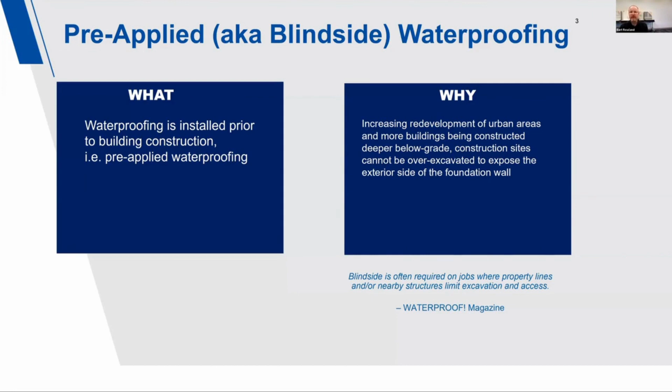Typically, you're using a substrate such as soil or gravel or a mud slab prior to the concrete being placed on top of the waterproofing membrane, or you could be using some type of shoring like a sheet piling or soldier pile and lagging, or even shotcrete for the membrane to be applied to prior to concrete placement. Really, you're only using a single-sided form to help make sure the concrete is placed correctly. So these are some guides for today's discussion. There are post-applied waterproofing applications, and that would be a separate discussion, but there's certain technologies that we'll speak to that can be used in both pre-applied and post-applied applications.

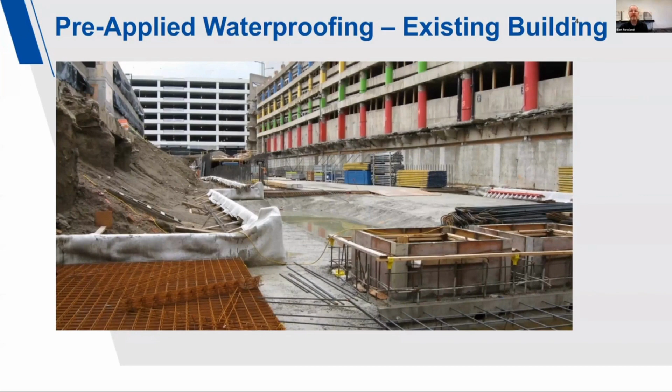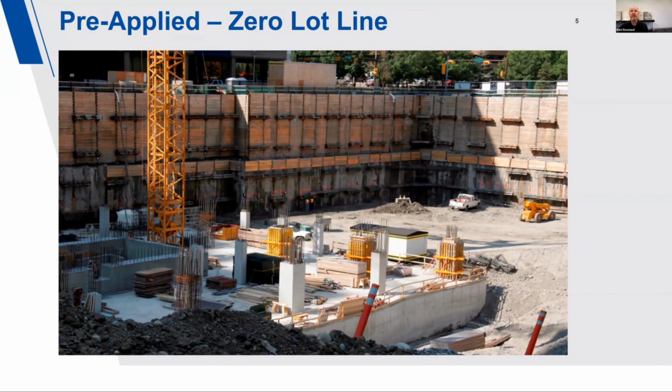Another example here, you can see a photo where you've got soldier pile and lagging, helping maintain the excavation so the site does not collapse upon itself. You can see active streets with street lights above it. So this is where an ideal pre-applied waterproofing application would take place. You would apply either a drainage composite on top of this shoring and then a waterproofing membrane, or if the substrate is suitable, apply your waterproofing membrane directly to the substrate.

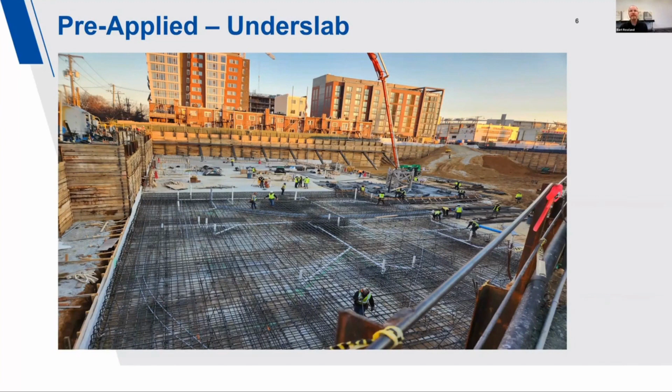One of the challenges, though, is that plywood adds to the cost, or could add to the cost. Additionally, if you put your membrane contouring around the inside of those sheet piling, which is common, it may require some additional detailing. So that means more tapes or mastics could be used wherever the membrane's cut to make those contours. And that could also drive up the cost, but further increase your risk. So these are the types of things, working with a company such as Henry, you'll get better guidance on what type of technologies are best suited for this type of substrate.

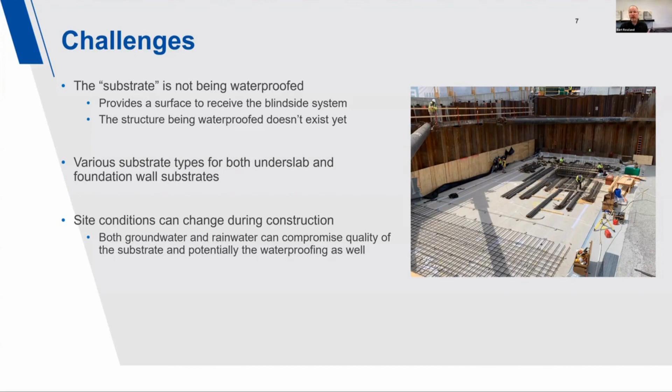And there's groundwater conditions where dewatering wells need to be active. And then you've got heavy rain in certain areas. This is the lowest point on a job site, so all sorts of debris and water are going to end up on that site. So how that affects your waterproofing membrane will be very important in your overall considerations.

And as I touched on earlier, sequencing of trades. There's a lot of trade traffic that happens on a job site, people dragging reinforcing steel, plumbers, mechanical, electrical workers that are trying to get their job responsibilities done. You need to make sure that the membrane is going to be sufficiently robust to handle that type of job site traffic.

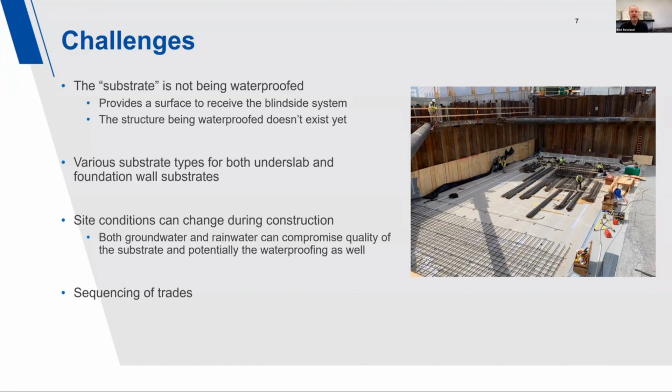Working with a manufacturer such as Henry will help you select the appropriate detail or provide the solution that will allow for the right detail to address that type of condition. Because ultimately you want to have a continuous, defect-free waterproofing application. And the term blindside applies because you won't get a second chance. You're putting the membrane onto a shoring or substrate, concrete's going to be placed.

You don't know if it's going to be perfect, but you have an opportunity throughout the installation to make sure any type of damage or sequencing can be coordinated through a pre-construction meeting, and everything gets addressed before it's covered in concrete. Because if it's covered in concrete, it can prove problematic at a later point, and then ultimately remediating could be very costly and time consuming.

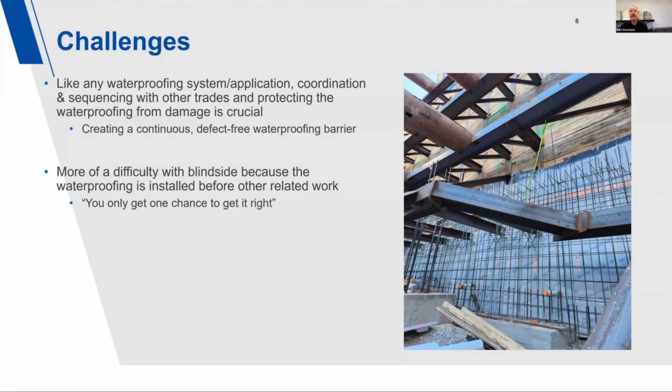So when you think about the subgrades, mud slabs can add to the construction cost. So if there's an opportunity to value engineer, typically mud slabs can be removed. Now, mud slabs as a whole are typically a lean mix concrete, and they may not always be in the best condition.

Some will be in very nice condition, but ultimately that might require some additional surface preparation, which can delay the schedule as well as could become costly.

Subgrades such as number 57 stone or compacted soil also give you a great substrate for your waterproofing membrane to be placed on top of, but to ensure that the subgrade is properly compacted may require some additional evaluation. That's where some of the quality assurance pieces incorporated in your specification can be of value, because that will help, maybe with a third-party inspector, validate that the compaction and the subgrade are in suitable condition to install the waterproofing.

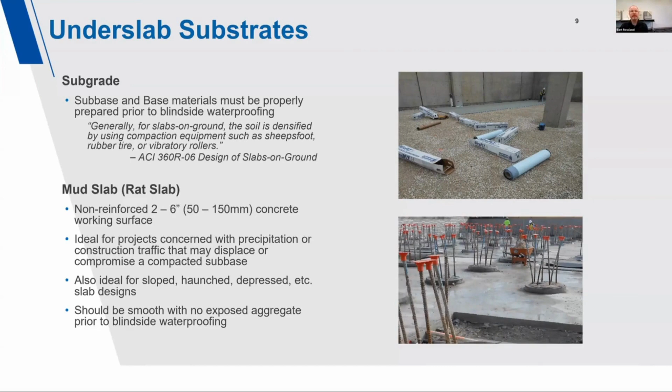Because if you look at this holistically, the speed of an installation in an overall construction project is very important to several parties on that job. You want to make sure that that speed or zeal to complete the project quickly doesn't compromise something as important as pre-applied waterproofing.

And I touched on this a little bit earlier, but with the wall substrates, you've got support of excavation, sheet piling, slurry walls. There's a number of different types of applications, and how you can detail those most effectively to not become problematic at a later point. When you have to remove whalers and cross bracing, how you detail that afterward is very important.

Tiebacks, soil nails, they have a certain problem in various projects, and you want to make sure you detail them correctly. Is it a very labor-intensive detail, or are there prefabricated tieback covers that you can use on top of it to ultimately reduce your risk while ensuring that continuous defect-free waterproofing product?

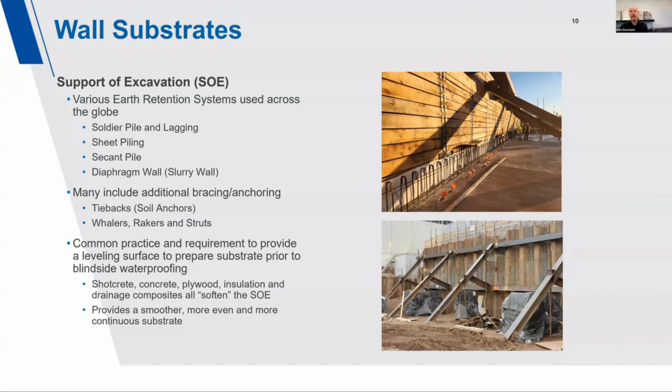Henry Carlisle Company looks at the risk factors and risk tolerance on projects through working with the design team and understanding what the ultimate goal or the end use application is, and that helps drive the product selection. There's not one product that we're going to use for low risk to high risk applications, or we're going to take a technology and then make it thinner based on the type of application. We have a wide breadth of portfolio which will allow us to select the appropriate technology based on the information we have on the project.

And we look at this a couple of ways. If the end use application is a parking structure or an occupied finish, there may be different drivers to product selection. Slab thickness: if it's a thin slab area, it's going to be easy to repair should there be damage or debris. If there's a thicker slab, then you really need a high puncture resistance type of product, and that's going to steer you towards more of the high performing technologies.

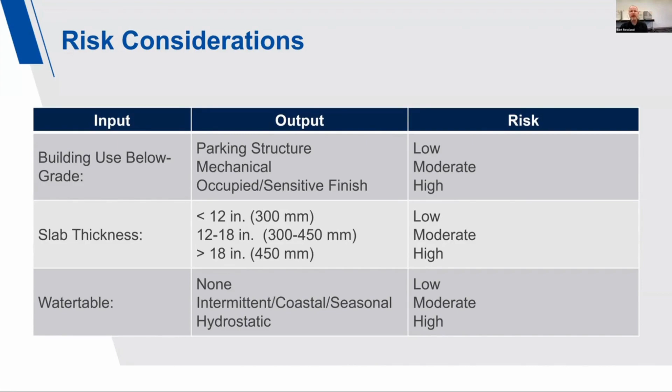And last but certainly not least, water. On-site water, is there water there? Is it seasonal? Is it a high hydrostatic condition? That's going to help you select a product to make sure that it's in the best position to keep that building dry. And there's another piece too, such as environmental requirements. Methane, radon, harsh contaminants in the soil. The different products have different types of performance in these types of conditions, and you want to make sure you select the right product.

One of the key differentiators, or an industry evolution if you will, is the lateral water migration. Most credible manufacturers test their membrane to ASTM D5385, which is the universally accepted resistance to hydrostatic pressure. Within the last 10 to 15 years, the lateral water migration test is more driven out of practical implications of what happens on a job site.

When there's a breach in the waterproofing and there could be water bypassing the membrane, getting between the membrane and concrete, is that going to be easy to remediate? In certain types of attachment methods for membranes, such as mechanically attached, water can move and it's very difficult to localize. So where you see the water might not be where you have to fix the water. So that's where a lateral water migration test is very important.

And right now it is not a standard test, but the ASTM is looking to standardize that test because multiple manufacturers have developed a method where they can test their membranes, but there's no one uniform standard that they're all measured against. So the ASTM committees are going to be looking to standardize that with various input from manufacturers to make sure that when everybody is measured against that standard, the data will support the utilization of those types of products.

Now I would like to focus a little bit more on the different types of technologies that I touched on earlier. For pre-applied or blindside applications, MiraClay is one such solution that can be utilized to solve low risk or medium risk applications. MiraClay is based with a bentonite mineral, and the bentonite mineral is comprised of sodium montmorillonite, and it's compartmentalized between a woven and non-woven fabric. It's needle punched together, and it's used to self-seal and self-heal on various job sites.

You mechanically attach it, so you would staple it together, shot and pin into shoring. And then because of its active nature, where water comes in contact with the bentonite, it will swell. And bentonite will swell up to 15 times its normal size in an unconfined situation. But under confining pressure of concrete, as well as a compacted subgrade or a shoring, it creates a hydraulic barrier which is impermeable, so water cannot get through it.

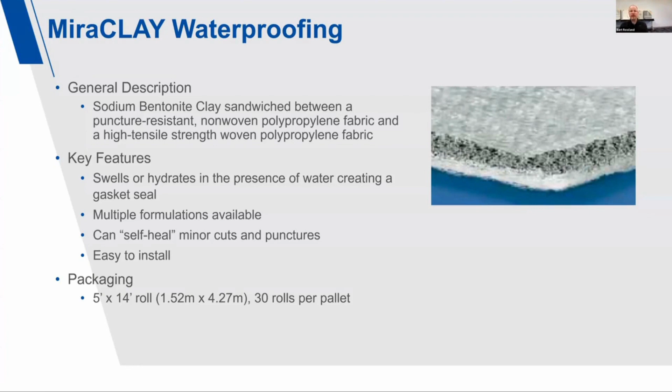But it's a very unique technology and has a mechanical attachment to concrete. It's been proven for hundreds of years in a myriad of applications, and it's a naturally occurring mineral. So it does have some challenges if it comes in contact with certain types of conditions. So there's enhancements that can be made to the product to ensure it performs on various types of applications. You can see here 3 different gradations of the product.

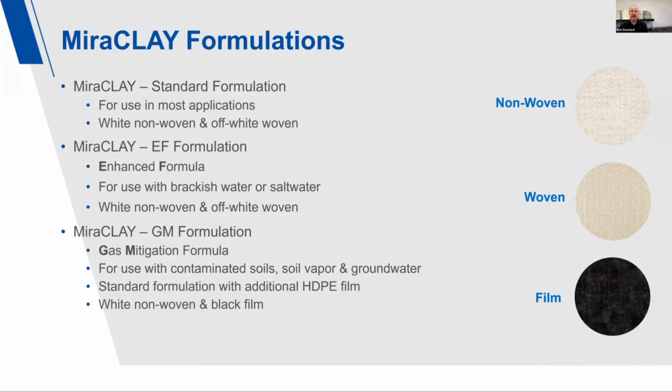The EF is an enhanced formula product, which incorporates a polymer which helps the bentonite swell in harsh conditions, as well as the gas mitigation formula, which relies on a high density polyethylene film, which will help protect the bentonite from certain contaminants in the soil that might impede its ability to swell and keep water away. But the entirety of the MiraClay product gives you a wide option based on site conditions to select the right type of technology based on your challenges on a job site.

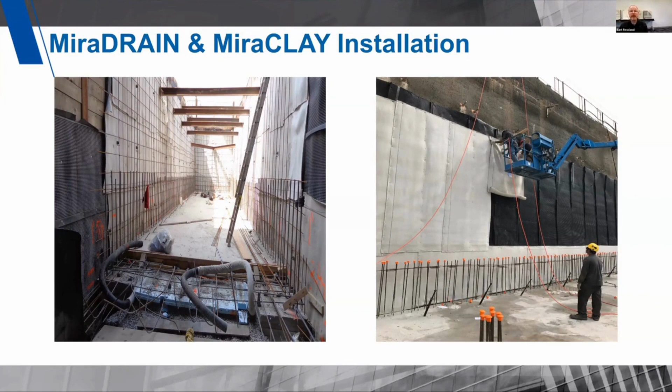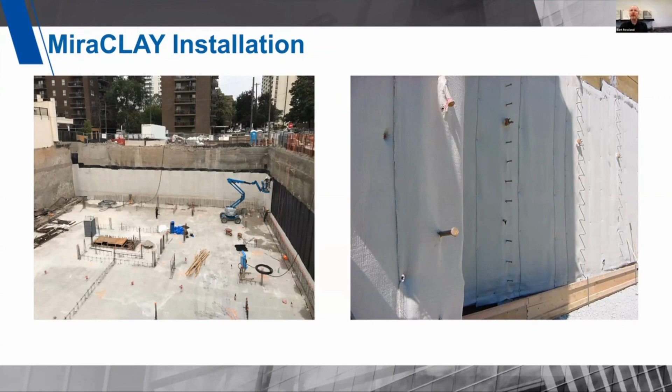So the MiraClay product will serve its purpose on certain applications. Working with a trusted advisor such as Henry will help recommend when and where this is the right product for your project. Here's a couple of additional photos. You can see a nice aerial shot of a large, deep foundation where you can see the MiraClay installed. You can see that the concrete is already poured prior to the walls being cast. And that's going to vary based on the sequences of the project. And you can see in the other photo, we've got some Nelson studs that can be detailed with some MiraClay mastic.

I now want to focus on the Blueskin PreSeal, and there's 2 different gradations of the Blueskin PreSeal product. What makes this very unique is the dual bond technology. It's a polypropylene plastic membrane with a polymeric saturated geotextile, which is embedded into that polypropylene. That polymeric saturated geotextile will have a mechanical bond, so you get the immediacy of the bond of that mechanical material, and then you can get the long-term performance of the adhesive bond, which is the polymers that are saturated within the geotextile. It's a very unique technology.

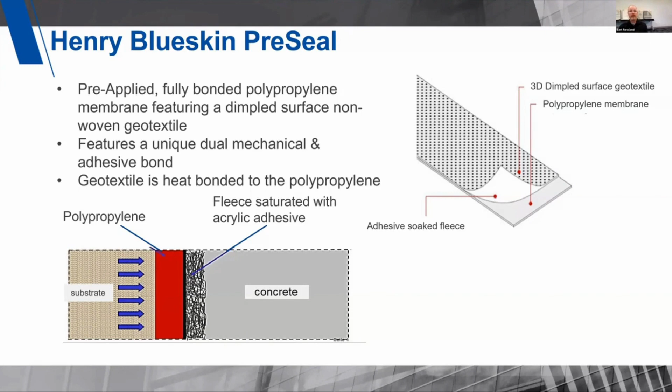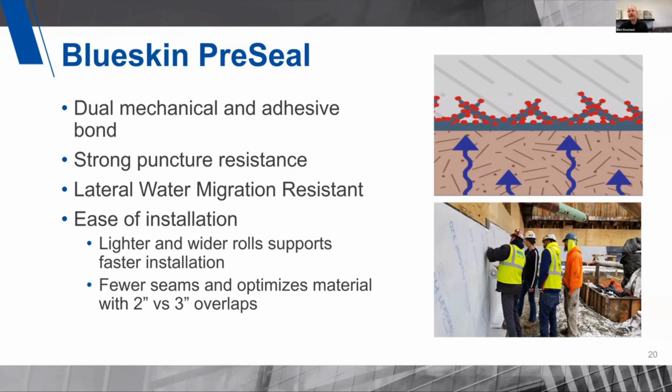It has the 2 different thicknesses, which I'll speak to in a minute. But because you have that dual mechanical bond, you get a very robust bond to the concrete. It does have lateral water migration resistance. It's got very strong puncture resistance because it's a passive technology. It's a rigid plastic, but it's easy to work with because it does have a wider roll, and I'll show you some photos there. It also is cost effective in certain situations because you do have more usable material per square foot with a 2-inch overlap versus a 3-inch overlap with certain products.

Here's the 2 different thicknesses of the material. You can see the Blueskin PreSeal 320 is a 32 mil system, as well as Blueskin PreSeal 435 is a 43.5 mil system. Both products are very lightweight. They have 2 different sizes, typically a 3.3 by 65.5 or a 6.6 by 65.5 foot.

Rolls. You can see they're very lightweight. They do both resist high hydrostatic conditions. They both have lateral water migration resistance, as I mentioned earlier, and you can use these interchangeably. Typically, the 320 is used on walls and 435 is used under slab in certain hybrid situations, but both are

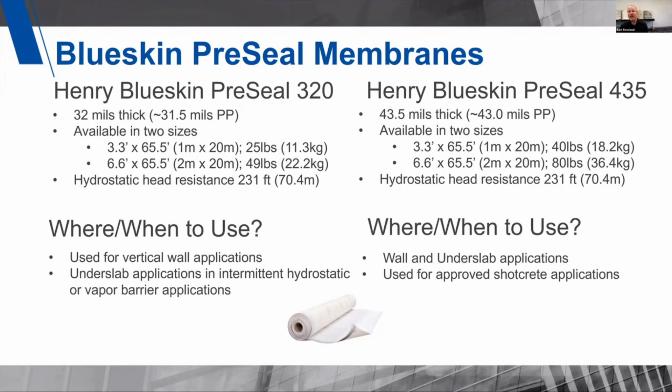standalone waterproofing products that can be used with a 320 on wall, 320 under slab, 435 on the wall, and 435 under slab. The 435 could be used for very complex installations such as shotcrete applications, which for those of you on the call, shotcrete is often more challenging to waterproof than, say, your traditional cast in place.

I want to focus here on these photos of this under slab application. You can see the reinforcing steel. You can see the tape used to detail and the overlap. There is a selvage edge within the membrane itself, but you also can put some additional tape seams for the end laps. In high hydrostatic conditions, you can do enhanced detailing to ensure that the material performs its intended use.

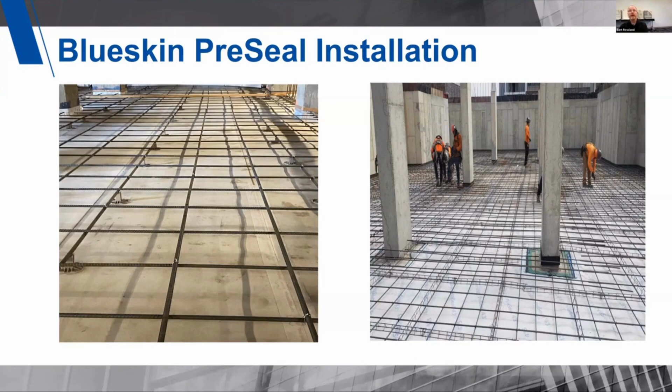And in these types of situations, high puncture resistance is very important. And that's where the puncture resistance for Blueskin PreSeal is over 225 pounds force, which gives you that confidence that if the number 4 rebar is going to be dropped on it, it's going to perform. It's not a risk. But again, speaking to the quality assurance importance, you always want to have inspectors and a well-trained installer ensure that the material is put in its best position to perform.

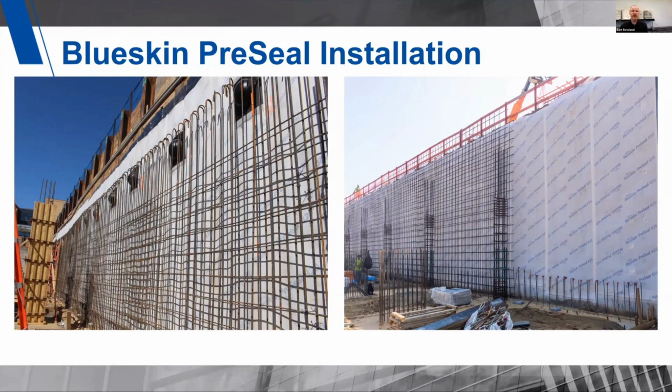Here's a couple of photos that actually show you a vertical wall application. You can see the prefabricated tie-back covers, as I mentioned earlier, but I want to focus on the width of these rolls. A 6.6 foot wide roll shows how you can reduce the overall number of seams on a project without increasing risk. These rolls being very lightweight, rolled down and covering up a lot of the area, they can accelerate the construction project, but without creating additional risk to the installer or the end user.

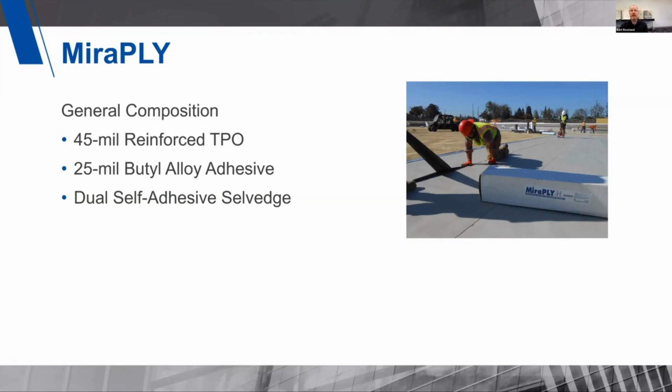MiraPLY, and both Blueskin PreSeal and MiraPLY are kind of in that moderate risk depending upon the application, but the MiraPLY product is an even more robust technology. It's a 70 mil product. It's a TPO with a butyl alloy adhesive, similar to PreSeal, where it's got the selvage edge, so it bonds to each other, utilizing its SeamLOCK technology.

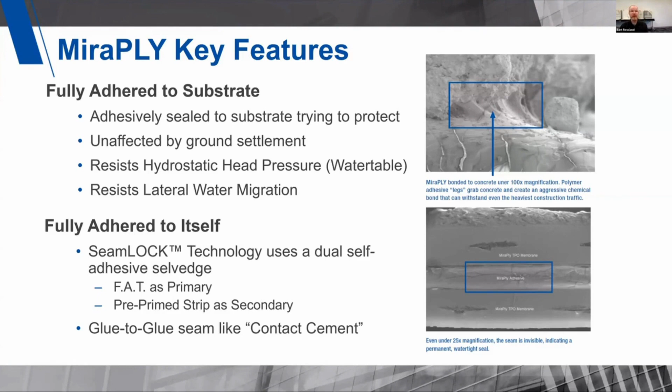The MiraPLY product also has a strong resistance to lateral water migration, has a definite performance against hydrostatic head pressure, and it has a tenacious bond through its adhesive bond to the concrete. It's also a very strong, high puncture resistant system, even greater than Blueskin PreSeal at over 300 pounds force. So it's a very strong puncture resistant product, ideally suited for very thick concrete slab applications.

There's 2 different grades of the MiraPLY product, MiraPLY H and MiraPLY V, and they're horizontal and vertical respectively. The vertical product actually has a release liner, which would be removed, but that tackiness of that vertical product can bond to concrete really quickly. So it helps ensure that adhesive bond that I mentioned, which is critical to this MiraPLY product.

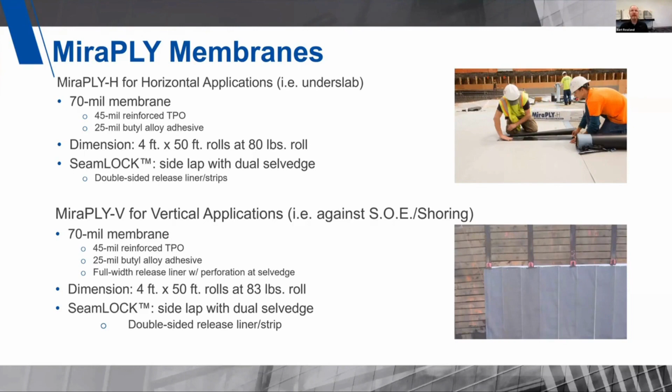It's very installer friendly, and you can see how robust it is. You can see the applications where you've got a lot of trades storing their materials on top of it, which is great given that 300 pounds force capability. Now you've got a long-term performance of the membrane, which will not be compromised.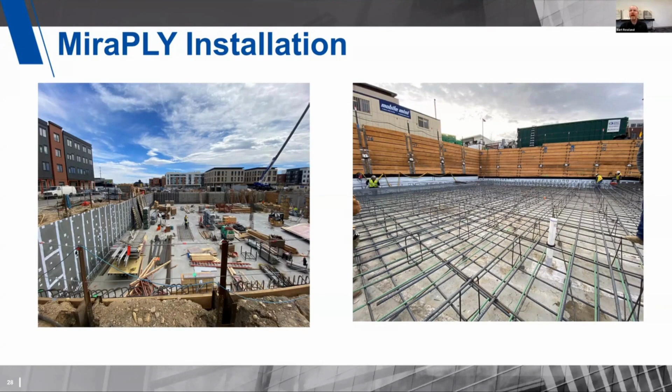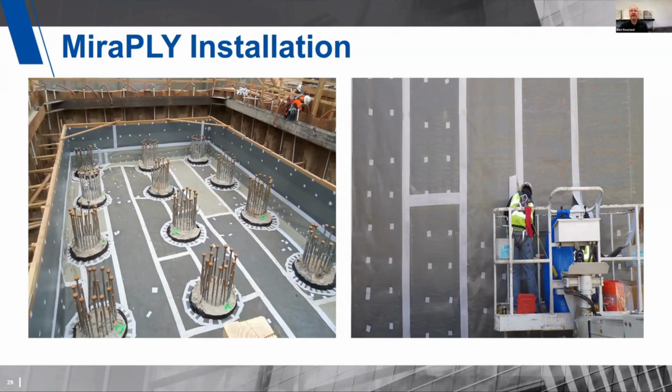You can see it's also easy to detail with these pile caps. You can see it's a tape seam system like the MiraPLY product, the Blueskin PreSeal product. In that tape seam, there's a detailing tape as well as a seam tape, as well as a number of accessory products that will help ensure the product is detailed and performs correctly.

Moving on to the MiraWELD, this is where you take all the physical properties of the MiraPLY and you enhance it even further with a welded seam. This patented technology with a welded seam gives you an adhesive bond or full bonded system with a weld, unlike some of the other products on the market which are welded, but they don't have that true integral bond that the MiraPLY and MiraWELD do.

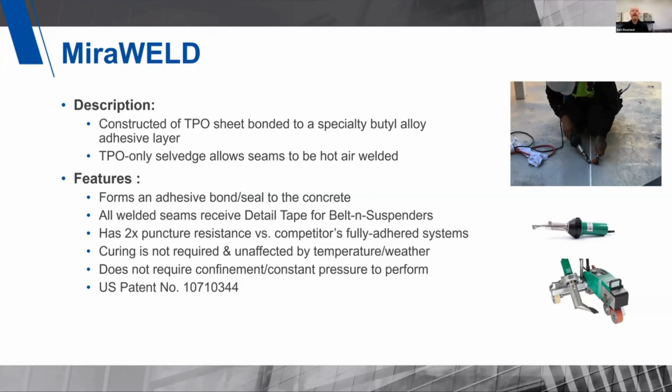It has incredibly strong puncture resistance like the MiraPLY, and you can also put a detail tape on top of that welded seam so you have a true belt and suspenders approach, because you may not get that second chance to keep that membrane and that wall or under slab area tight.

That toughness that I mentioned is very important because of thick slabs, trades, everything that I mentioned earlier. You want to make sure that that material can withstand inclement weather, harsh job site conditions, and third-party damage as much as you can.

The welded seam: there's different types of equipment that can help with welded seams, handheld welders, automatic welders. This is very important because this relies on very skilled and well-trained labor. So it's different than some of your mechanically attached systems or your tape systems. This is usually a select group of contractors that are very well trained by the manufacturer, such as Henry.

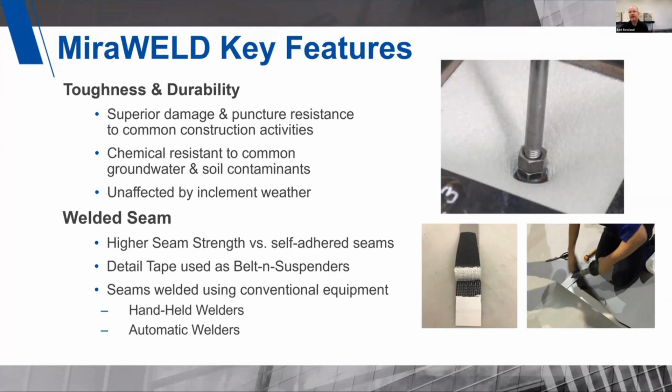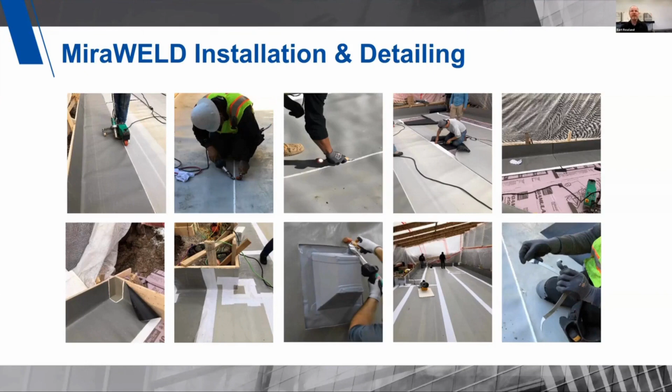So you can see here some photos of probing the seams. Again, a great opportunity for a third-party validation on a job site is to probe seams or ask for documentation from the installer that he's been trained by the manufacturer to install this type of material. You can see here on these photos, thick rebar slab, as well as the release liner and tape on the photo on the left.

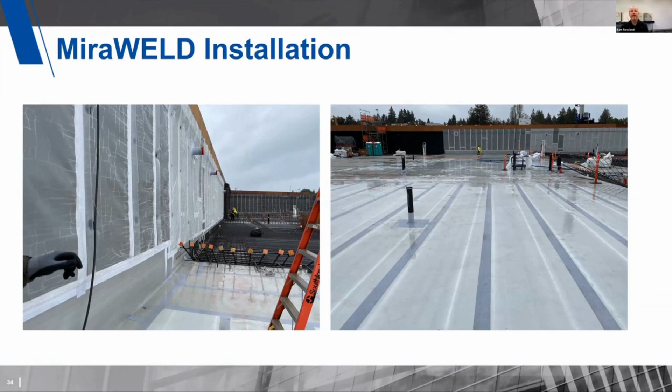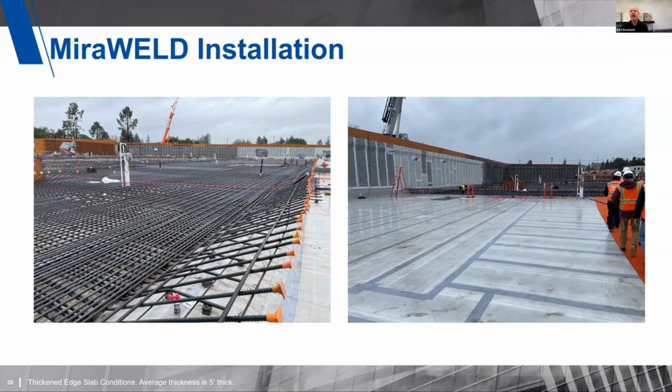Then you would have the photo on the right where you've got the exposure to rain, and the seam integrity is there. Close up of that thick rebar, and you may see that air horn. That's okay, that will be removed. And then you've got your similar exposure, performance, and harsh sites. And you can see the added precaution of coordinating the trades to walk through a certain area with that walk pad, which is ultimately going to help the membrane perform throughout the project.

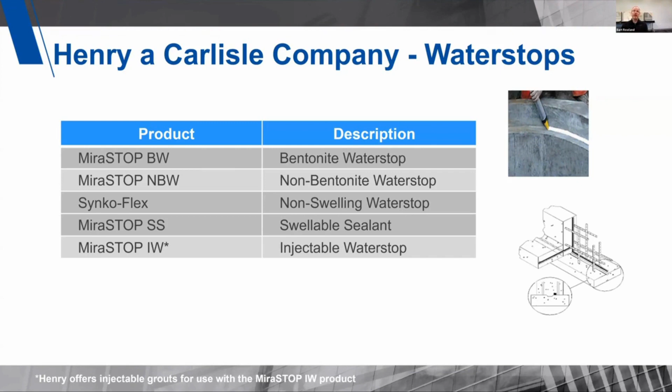No waterproofing or pre-applied application would be complete without considering the full suite of the system itself. And I want to talk about the water stops. There's a number of water stops that Henry, a Carlisle company, offers: our bentonite water stop, non-bentonite water stop, Synko-Flex, and the injectable water stop. The injectable water stop, I'll touch on that because that's truly a form of insurance. But I would look at all water stops as a low-cost insurance for a project.

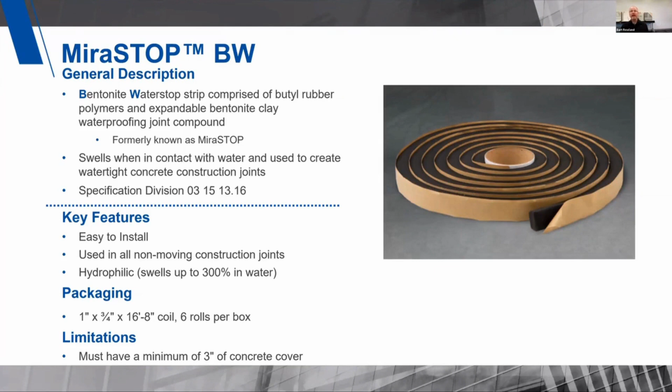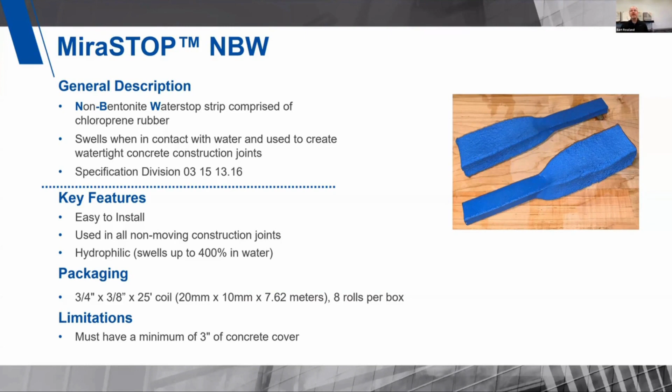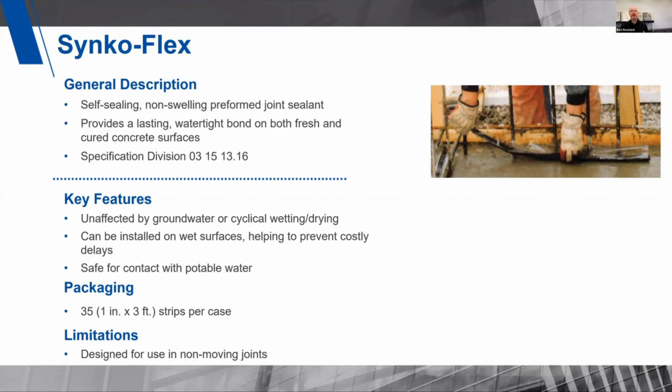The bentonite-based technology is a very widely accepted technology, which swells when it comes in contact with water and can fill some poorly consolidated concrete, a wall slab, or around penetrations. Similarly, the non-bentonite water stop is a chloroprene rubber, which will give it greater chemical resistance, but it's still very much a hydrophilic technology, so it will swell in the presence of water. Synko-Flex is much more chemically resistant than some other water stops, but it doesn't have a swelling capability. But it has great job site survivability because it's bituminous based. So this can be used in various applications such as potable water confining tanks.

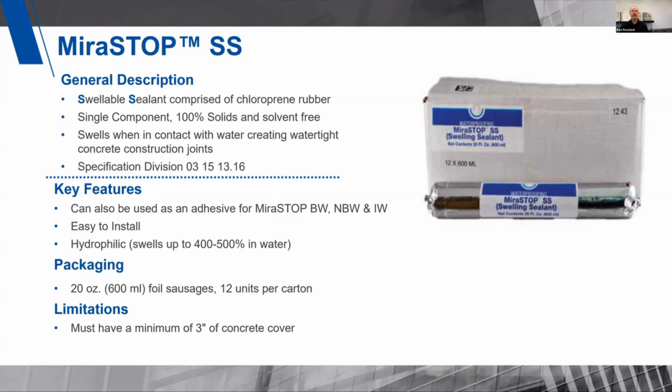The MiraSTOP SS, that's a swellable sealant. That too can be a standalone waterproofing, but it can also be relied upon for additional detailing to make sure that the waterproofing in an intricate condition has an additional level of assurity around, say, a pipe penetration or reinforcing steel in a shotcrete application.

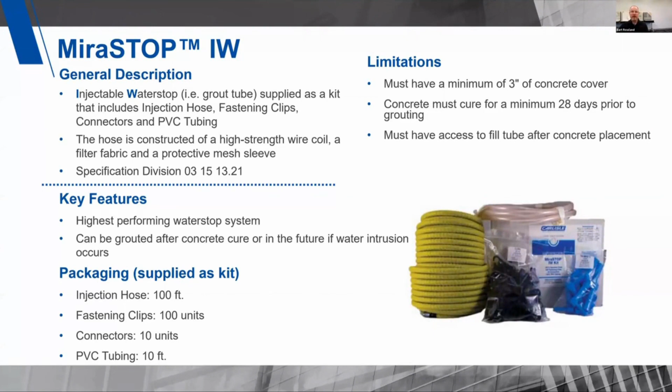The injectable water stop, as I mentioned a couple of minutes ago, is like a low-cost insurance. You put it into place, and if there's water ingress, you can come back and address that water ingress at a later point. And here's an example of where that's of value. You can see the tubes that would be accessible after the application, maybe a little box where you can come in and inject your grout at a later point through the MiraStop CGF or the CGHS.

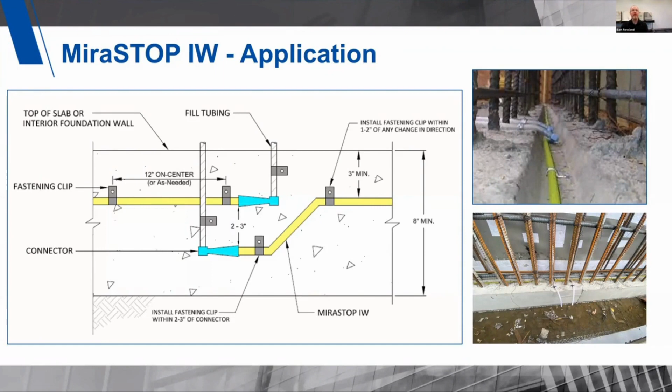This gives you an opportunity to fix it at a later point should there be a problem. It's the ultimate low-cost insurance because you've got the opportunity to fix it now versus trying to remediate at a later point where there's a lot of drilling through the wall, which can become very problematic and extremely costly.

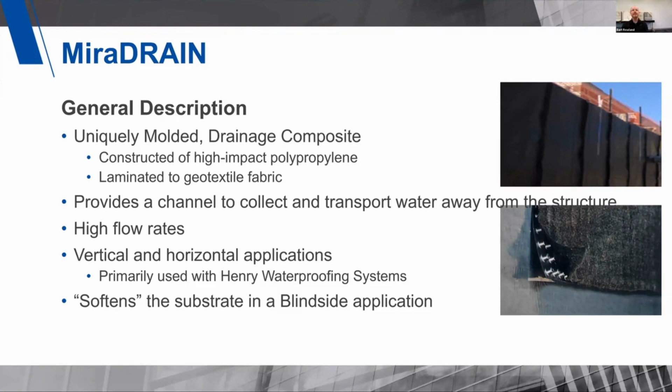As I mentioned earlier, it's not all about products, it's about the overall quality assurance. And the quality assurance is very important when you think about the specification itself. What other than a product can you weave into or incorporate into your specifications? An applicator, geotechnical review.

This is kind of a trusted partner where you have a manufacturer that you can rely on to provide you quality information and help guide you on that project journey. Pre-construction meetings make sure the expectations are set at the beginning, as well as the third-party inspections that I mentioned to help ensure that the intentions are met throughout the project.

An approved applicator, I think this is a very important piece, and this is why I'm here in Carlisle, Pennsylvania today at the Training and Education Center. It's very important to point out that manufacturers have true, credible training programs, not just site demonstrations or exhibitions where they show material at a yard, or the approval of, say, low bidder just to get the project. A manufacturer accredited training program is a very strong quality assurance specification to help you and your customers make sure they get what they pay for.

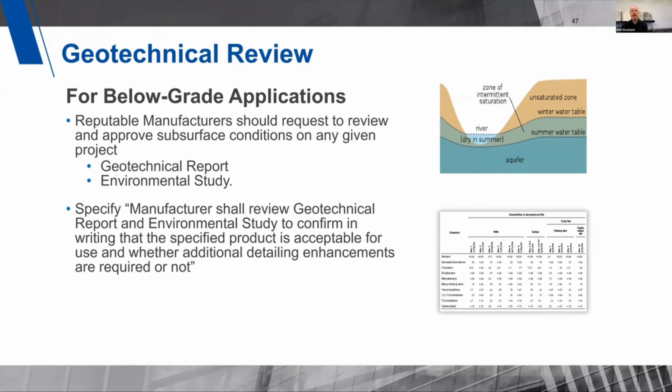Another example is this geotechnical review, not one product for every application, but understanding the site conditions to make sure that you get the appropriate level of waterproofing performance based on your particular site conditions. That's where Henry can be of value to you, providing you this type of technology, this type of support on an active project.

Third-party inspections, this is where you validate everything that's been discussed: the quality of the manufacturer's manufacturing process, the quality of the product being installed, the quality of the installer testing the material, installing the material. You've got an objective evaluator trained by the manufacturer to make sure that everything that you've asked for and specified is getting delivered. This helps everybody address situations when they arise before they're covered in concrete, which is ultimately a concern if something gets past that team. Now it becomes a problem, and it could be very frustrating for the design team as well as the owner if their project has water ingress.

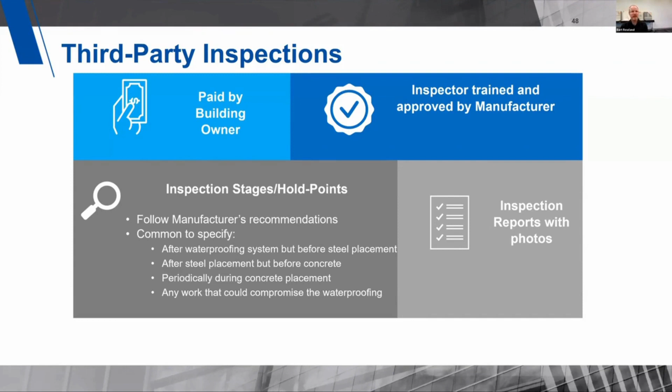So if you incorporate all of these quality assurance principles as well as high quality products, you give yourself the best opportunity to mitigate your risk on various challenging pre-applied projects. And in summary, this is kind of how we look at applications, where we can see our low-risk solutions up to our high-risk solutions, MiraClay, PreSeal, MiraPLY, and MiraWELD, because we have multiple solutions based on the technologies and your site conditions. As I mentioned earlier, we're not going to take one product and try and shoehorn it into every type of application. We want to understand the application before we make a product recommendation.

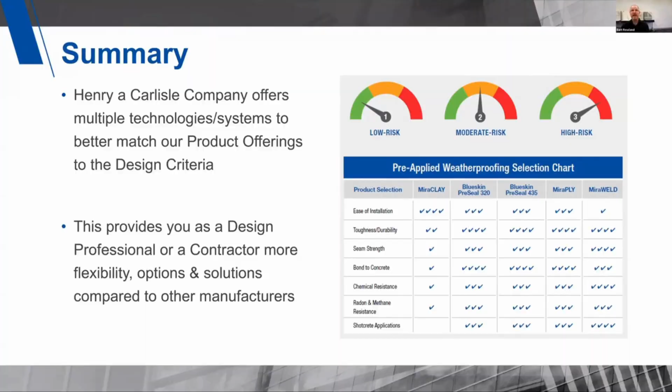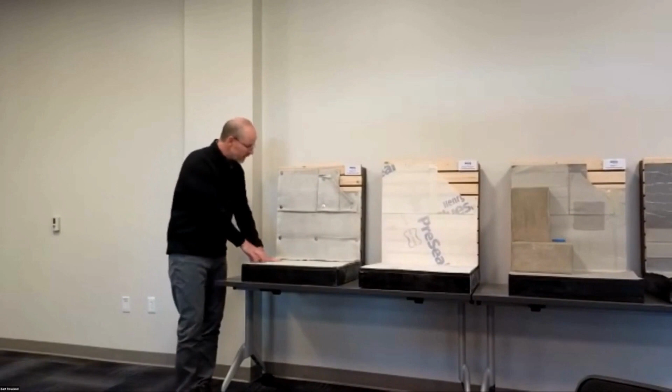I'd like to now show some actual examples of the material. You may be able to see me with the actual material behind me. I want to move towards our MiraClay product. You can see the fibrous nature of the MiraClay. You can see the needle punching. This is a wall slab transition area, just for mock-up purposes, with the mechanical attachment up close. The wall slab transition base area. Your sheet coming down from the top and tying into the next one. So this is your lower risk application.

Then moving on to the Blueskin PreSeal, you can see it's a taped seam instead of the self-sealing, self-healing MiraClay. It also has a selvage edge, which you can see here, and it can be mechanically attached with tape over top or detailing on top. Here's an example of our MiraPLY product with that integral bond of the adhesive, as well as the MiraPLY V, where you remove the release liner and you get that integral bond with the concrete. Here's also an example of a critical waterproofing system piece, MiraStop EVW.

And last but certainly not least, the high-performance solution of MiraWELD. MiraWELD is your thermoplastically welded system. You can see the added detailing tape on top to truly give you that belt and suspenders type technology, which will give you that integral bond between that detailing tape, because it also has an adhesive on it, which bonds completely to the underside of the concrete. But you can see we have a full suite of pre-applied waterproofing solutions.